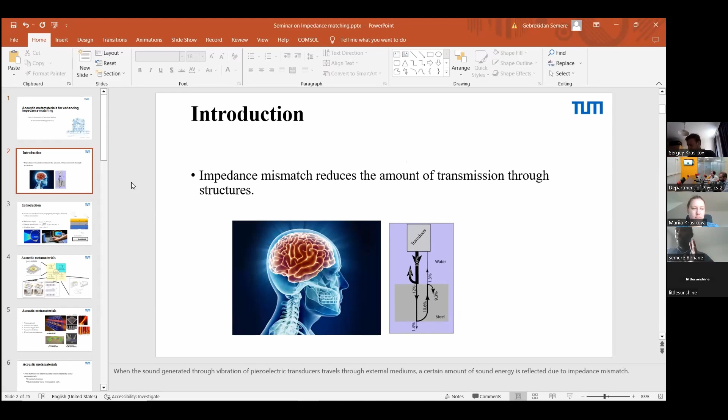For example, in transducers, when the wave is generated by piezoelectric materials, it passes through the air or different layers of materials, and there is a large amount of impedance mismatch or reflection during this propagation. Reduced transmission means the image quality or the target detection quality will be lower. So the aim is how we increase the transmission so that we can enhance the imaging or detection, for example, for tumors, for non-destructive applications, and also for various applications.

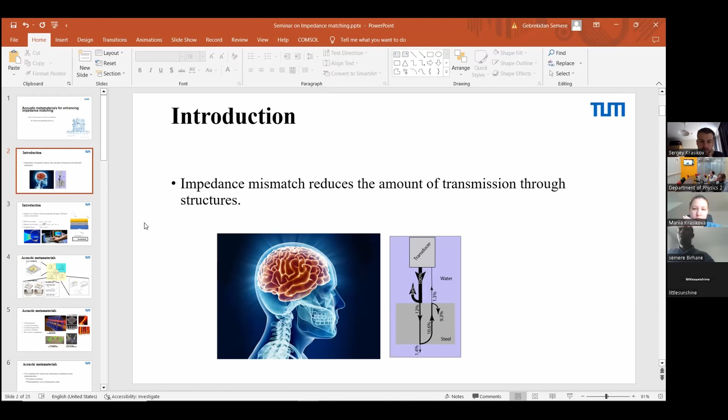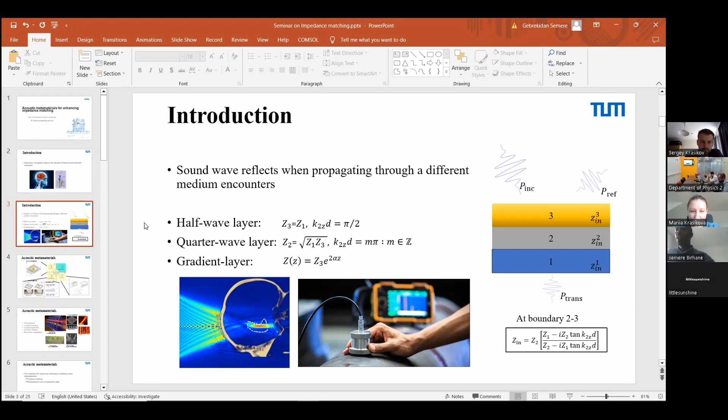Traditionally, there are different approaches. The most common one is using quarter wavelength layers, by designing a material in between the two materials, and we can design perfect transmission at narrow bandwidths. However, if we want to increase the bandwidth, we have to have more layers, 3 or 4 layers. So this is one of the disadvantages of these methods. For example, at higher megahertz frequencies, it becomes more complicated to manufacture and integrate these quarter wave impedance layers.

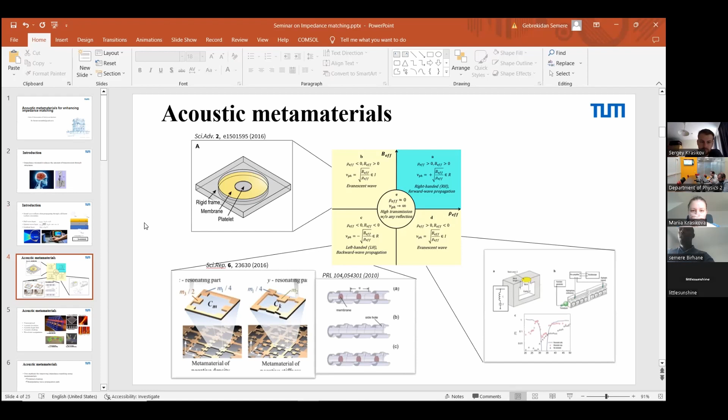So in the last few years, acoustic metamaterials have been developed, and they have shown a number of applications, for example, negative density, negative bulk modulus, and near zero effective density, which you are all familiar with. There has been development in various applications, for example acoustic imaging, acoustic cloaking, hyperlenses, and a wide range of applications. So the concept is how we develop an impedance matching layer using acoustic metamaterials. We proposed two ways in general.

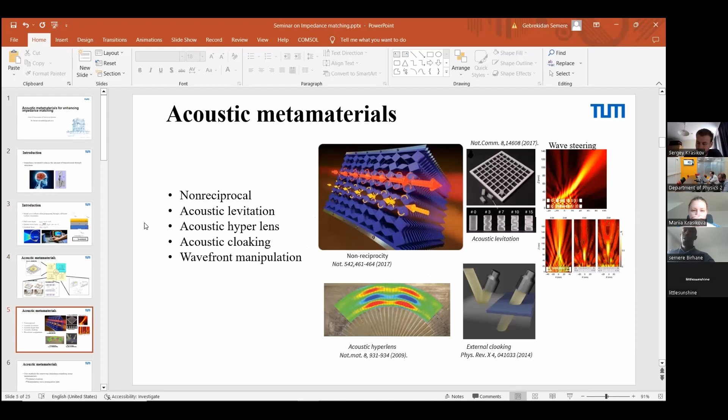The first one is using external cloaking, and the second is by manipulating wave propagation paths. We can use acoustic metamaterials to work as an impedance matching layer based on these two ways. So first we see how external cloaking works. When we say cloaking, I think you are familiar with it. Basically, it does not depend on the material property. It involves how to deflect the wave around the material rather than through the material. So this kind of cloaking doesn't help in such practical applications.

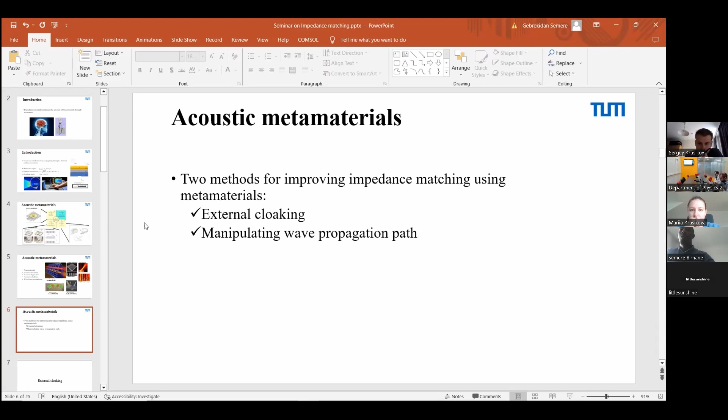So there's a concept of external cloaking, in which we consider the mechanical properties of the material, for example the impedance and the density, and then we can design complementary acoustic metamaterials that cancel the reflection from that material. I will discuss this further in the next few slides. With external cloaking, researchers have combined two different independent mechanisms to achieve transmission.

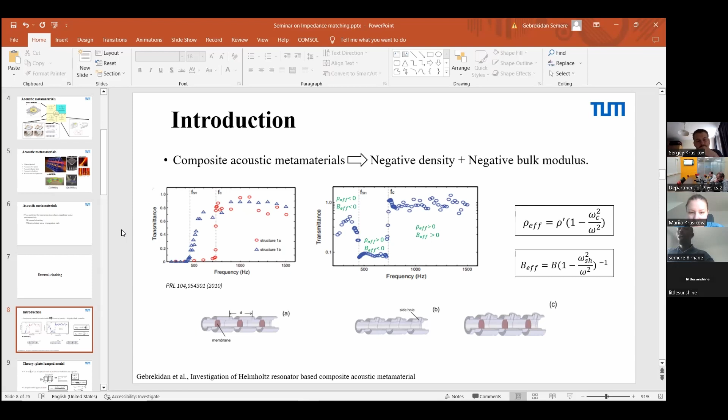So our first idea is, how do we use these Helmholtz resonators instead of these side holes? Helmholtz resonators are well known for their absorption characteristics, not their transmission characteristics. So basically, they are used widely for just absorption. But what makes them interesting is they also have a band gap. Maybe we can use that band gap to design what we call a complementary acoustic metamaterial.

So first, we use the plate lumped model theory to analyze the negative density of the periodic arrangement of the plates. And as you can see here, the effective density can be approximated based on this equation, which is using lumped model approximation. And to compare this lumped model approximation with the numerical simulations, this formula can be used to approximate the effective density of the periodic arrangement of the plates. And we assume the plates are constrained, or not moving at the boundaries.

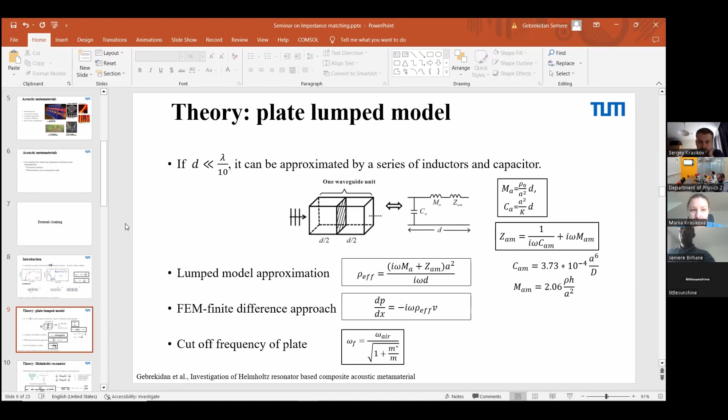And similarly, we used Helmholtz resonators. The same way we calculated the effective bulk modulus, or the inverse of bulk modulus, which is compressibility, using this lumped model and then the finite difference model. And then we compare these two models, how they capture the principles of this kind of structure. And you can see here, both the analytical method and the simulations capture the principles really well in the given frequency range.

As you can see also, along X and along Y direction, which we simulate independently, negative density has been observed, as you can see here. And also for the bulk modulus or the compressibility, you can see they also approximate really well. They're in good agreement between these two methods.

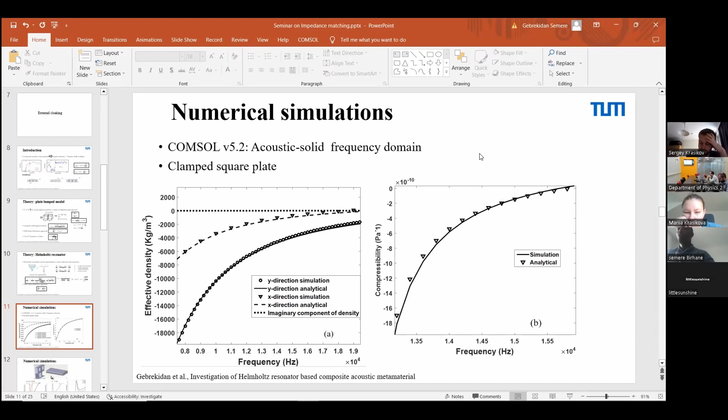So our next approach is, how can we design complementary acoustic metamaterials from these structures? First, we have to investigate their transmission property, as you can see here, independently simulating the structures. For example, for the plate and the Helmholtz resonators, the plate has a cutoff frequency around 31 kilohertz, and the Helmholtz resonator has a transmission dip around 14.5 kilohertz, which is around the resonance frequency of the Helmholtz resonator.

So you can see that at this frequency, there's no transmission at all. So when we combine them together at this particular frequency, we get full transmission, as you can see here, so that it becomes transmissive rather than opaque. So we can say that this metamaterial, the combination, can transmit sound waves through its structure.

And then we further investigate how the number of unit cells affects the transmission property. It means if you increase the number of unit cells, as you can see here, the amplitude increases and the bandwidth becomes narrow. But we use 9 unit cells for this case, so we expect a moderate amount of transmission.

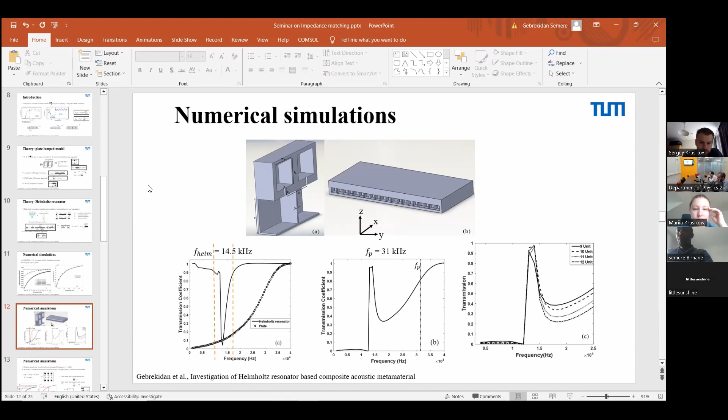And then we choose our target material. For example, for medical application, like I said earlier, we choose a skull layer. The skull layer has a density of around 2,000 kilogram per meter cube, and a speed of sound of around 2,500 meter per second. Based on acoustic coordinate transformation theory, we can use this material property and design the inverse of the material property, which is a complementary one, by using these equations.

So basically, we assume that the CMM, or metamaterial, width is equal to the width of the target material, and along the y-axis it becomes half of the target material, the skull layer. So by substituting these equations, along the x direction the metamaterial should have negative half of the density of the skull layer, and along the y-axis it should have negative twice the density of the material. Similarly, also for the bulk modulus.

So based on this, we go to the effective material property graph, as you can see here on the left side. And at the given frequency range, for example, along the x direction, it should be around minus 1,000 kilogram per meter cube, which is approximately given by this red dotted line.

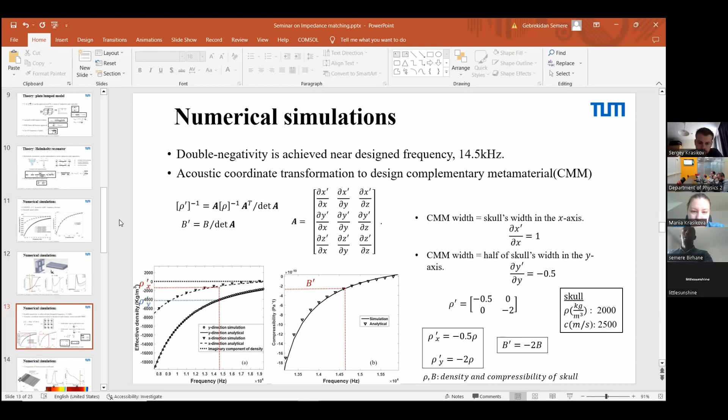And even though these methods are attractive, one limitation is that we need a controlled environment, and also at submillimeter dimensions they become more complicated to manufacture. And another one is they work in a single frequency range, which means their applications are limited. So how we increase their bandwidth is our next goal.

So this is why we consider manipulating the wave paths, how the wave propagates inside the metamaterial. By modifying that, we can broaden the bandwidth of the transmission. A number of researchers have developed methods to increase transmission through these metamaterials, for example, using an impedance matching layer or gradient layer structure, or a periodic arrangement of structures, to increase the transmission bandwidth of these metamaterials.

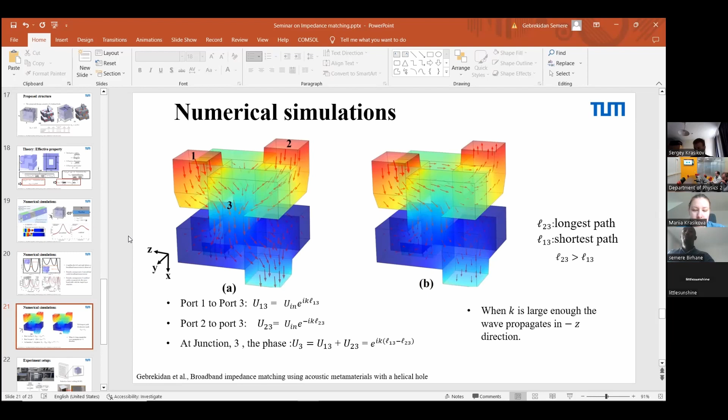And after signal processing, we get the transmission performance of the unmodified structure and the modified structure, and the metamaterial hole size is about 1 millimeter and 0.6 millimeters. Manufacturing at these sizes becomes more complicated, and the precision is not that detailed at such small sizes. So there are slight discrepancies between the numerical methods and the experimental methods, as you can see here.

However, we can still say that it can capture how it works, or how this metamaterial can be represented, even though there are slight variations in terms of amplitude or resonance frequencies. Other authors also discuss such variations between experimental and numerical results for subwavelength holes.

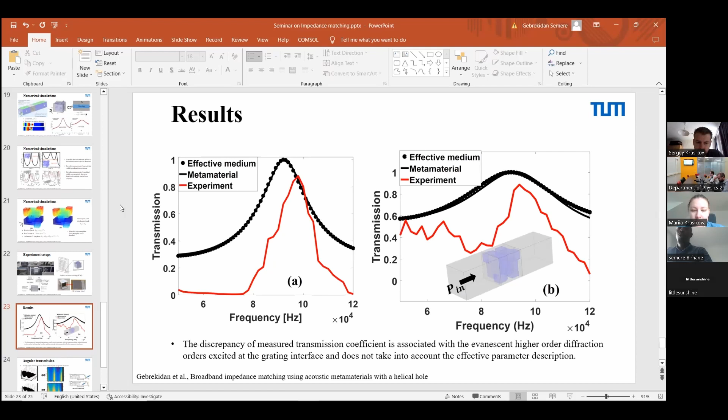Our next approach is, since not only broad bandwidth, how about their angular property, or what happens if there is an oblique incidence? So in order to capture this, we did numerical simulations.

So in general, we concluded that the external cloaking methods are perfect for an impedance matching layer with a third medium, but they require higher precision manufacturing and controlled experiments. For example, the tension of the membranes or the plates should be controlled precisely, and if it can be done, it's very attractive for medical imaging applications because they can capture the evanescent wave present in the vicinity of this material.

In terms of wave path manipulation, basically we are dealing with impedance matching between the background medium, which can be water or air, and the metamaterial, which does not include a third medium. So it still needs a little bit of research using a third medium to see how this behaves. And there are fairly straightforward applications: they are compact in size and have broadband characteristics.

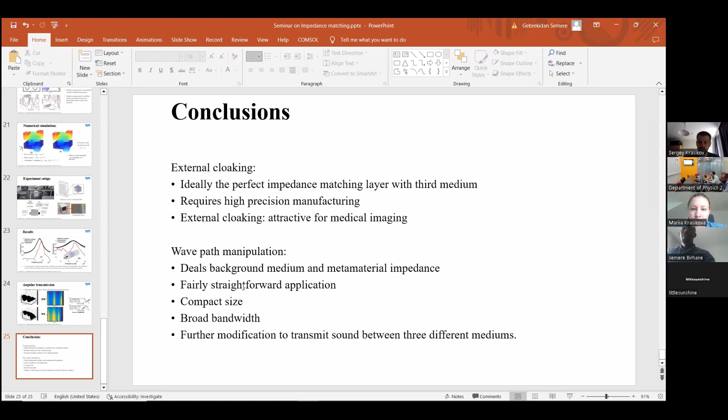Maybe my question will be first, and it's in general. Could you tell me, is there any rule for the design of unit cells? On some slides in the first part, you've shown how it was designed. Yeah, maybe here, somewhere there. Is there any rule?

No, there's no rule actually. We used a trial and error method to develop it, and we tuned the range to work in the frequency range that we intended. So there's no general rule, I would say.

And Sergey, could I ask one more question? Yes, please. Semere, is there any frequency limitation for this technique? For example, would it work in the megahertz range or just in the kilohertz range?

It is working in the kilohertz range, which is a middle frequency or ultrasonic frequency range. But for an upper frequency range, the hole dimensions should be much smaller, which creates more complexities during manufacturing. There are also other effects, for example thermoviscous effects, which will have a significant effect on the transmission performance of the material. So it depends on the frequency range we investigate; we can tailor the properties of the structure to fit the frequency range we want to design for.

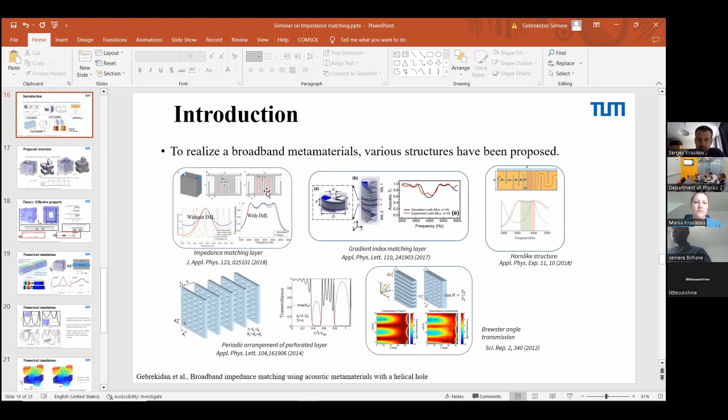Yes, actually, the principle you mentioned, we use it for sound absorption, for example. If we increase the length, the dissipation will create some losses, and then we get smaller transmissions. However, in this case, the design structure, like on the previous slides I showed you, has a number of lengths or structures where we have Fabry-Perot resonances. And these Fabry-Perot resonances can actually create high transmission peaks.

So this can be used along with, you can see that it is near a quarter wavelength, which is around 4.1. And based on these combinations, along with constructive wave interference, we get broader bandwidths using such structures. Yeah, thank you.

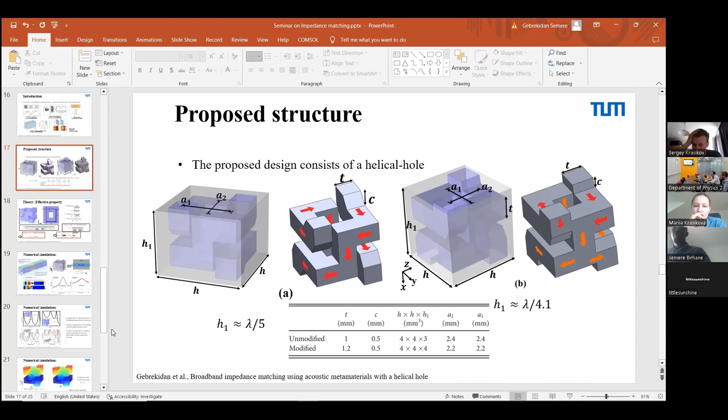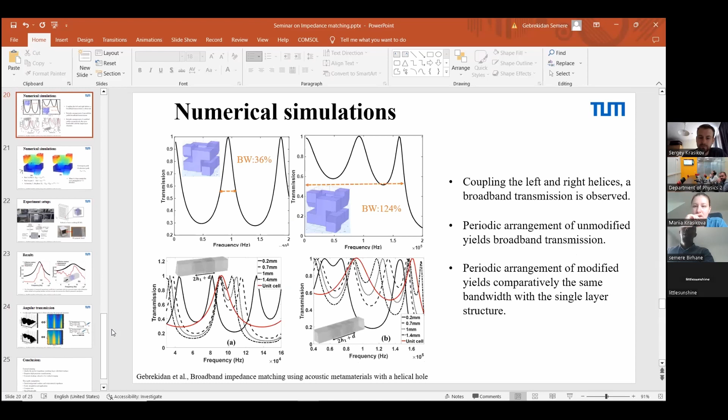Yes. Actually, like I discussed earlier, Fabry-Perot resonances occur. For example, based on these equations, at multiples of pi we get these resonances. So based on that, we get periodic resonances. That's why we have this kind of transmission.

Actually, if you compare them, you can see that the lower one is the modified one. It has broader transmission in the given frequency range compared to the upper ones. So I would say it is due to this Fabry-Perot resonance. Yes.

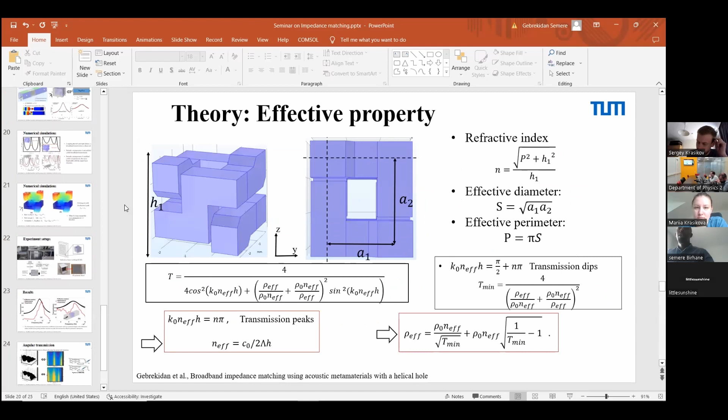Yes, actually, it depends. We have to treat it as a different impedance, but we use water because its properties are much more related to those of tissue. So we use water to approximate the density and speed of sound. But for practical applications, there is no water. There is the transducer, then maybe a gap or a couplant, and then the skull layer. So it's a totally different concept for practical applications. I don't think it works for practical applications in this way.